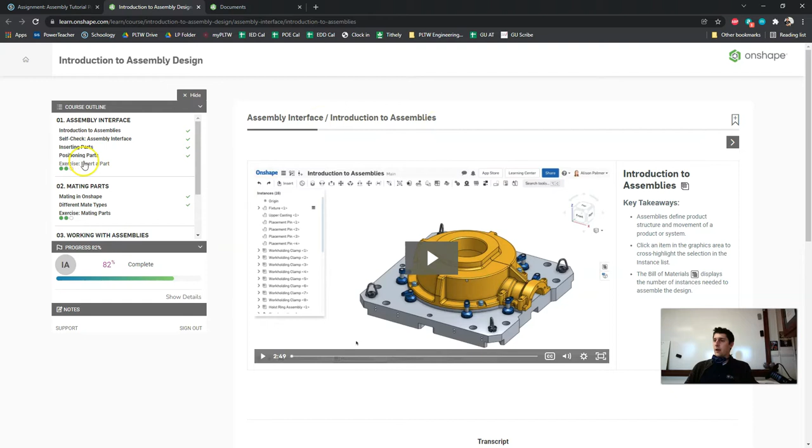Okay, I'm going to skip the instructions, but you definitely should not. These videos are very useful for your understanding of assemblies, but in this video I'm just really showing how to make the parts. So the first one that we're going to make is this part right here, which is the universal joint part. So I'm going to go ahead and start the tutorial.

The first thing we're going to do is click on this link to open Onshape's version of the public document. Now this is a read-only document, so if we really want to edit it, which is what we're doing, then we want to make a copy of this. So I'm just going to rename the back end of this, removing the copy part, putting my name on it. So that will open my own version of the document.

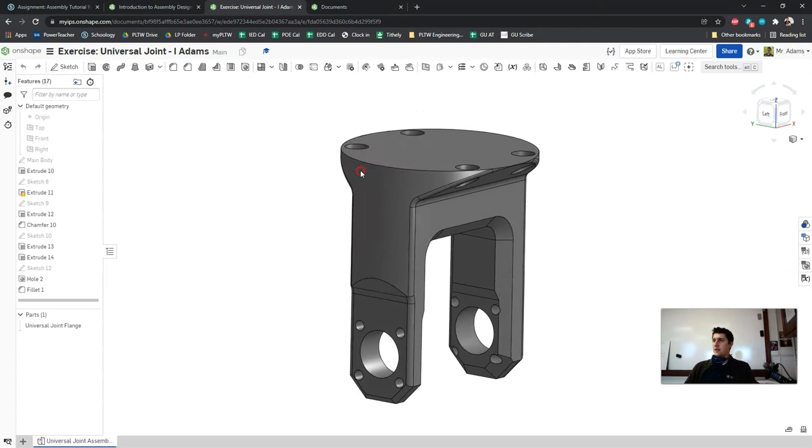So this is the universal joint part. I am in a Part Studio tab. So if we go back to the instructions and we go to the next step, you'll see that it's asking us to create an assembly. We're going to do that by going down to the bottom left corner of our screen, clicking the plus button, and going to Create Assembly.

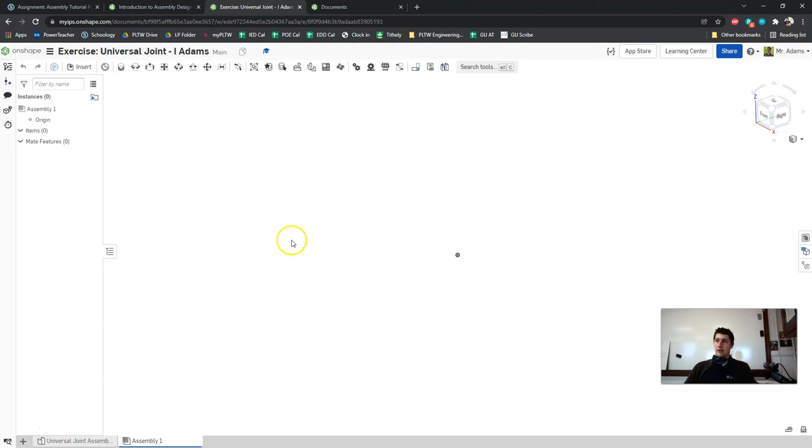Now, when we open the assembly for the first time, you'll see that our assembly environment is completely blank. There's nothing there, which is why the next step is for us to insert the part from the menu. So I'm going to go to Insert, click on my part, the universal joint assembly, and after it thinks about it for a minute, you can see that there's my part.

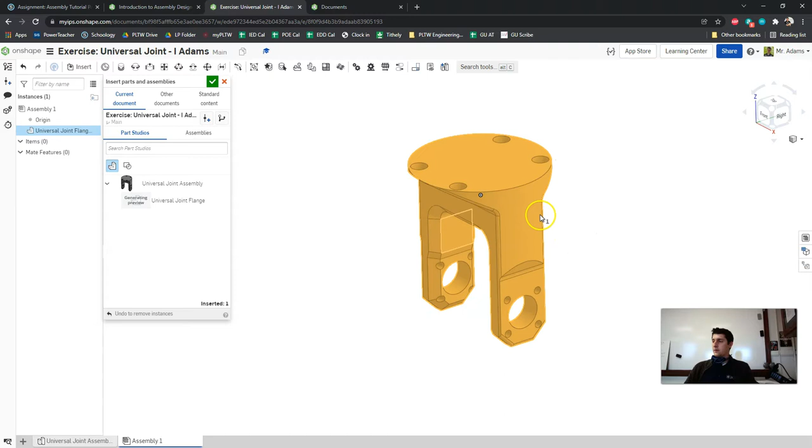So I'm just going to click to place it, and then I will click the green check to accept. I don't really know why it's moving around like crazy like that. If you don't get the option to insert, then you might be in the Part Studio tab still, so just make sure you go over to the Assembly tab.

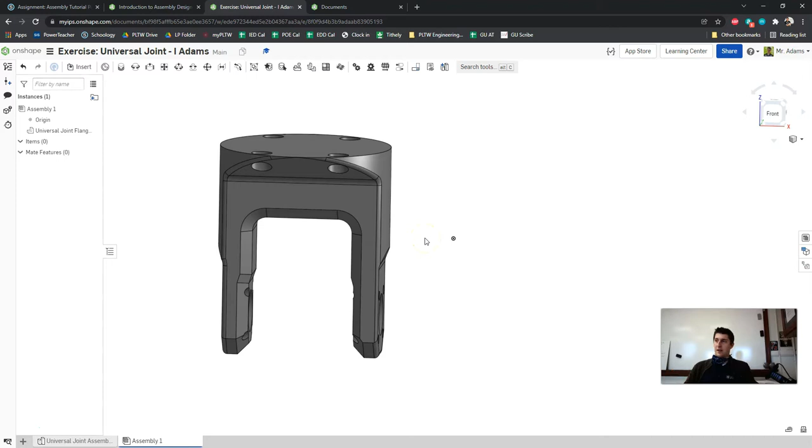Now, this part is in the assembly, but it doesn't have any relationship identified. It's just kind of there. It doesn't have a position or coordinates, or it's not fixed or anything. You can see I can just drag it around in 3D space. So part of today's tutorial is learning how to make something fixed and have a very specific place that it lives. So let's go to the next step.

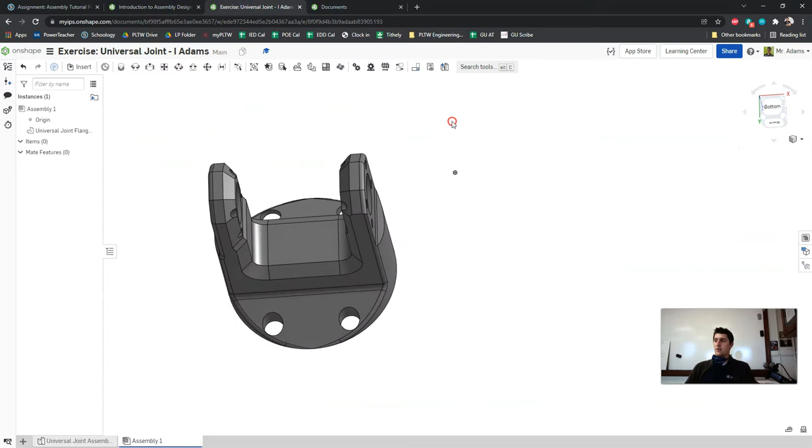The next step is a little bit confusing, so I want to make sure that you pay attention carefully here. So it says that we're selecting the part to display the triad manipulator. Then drag and drop the triad to the shown mate connector point. Alright, so let's start with the triad manipulator, which is really fancy sounding.

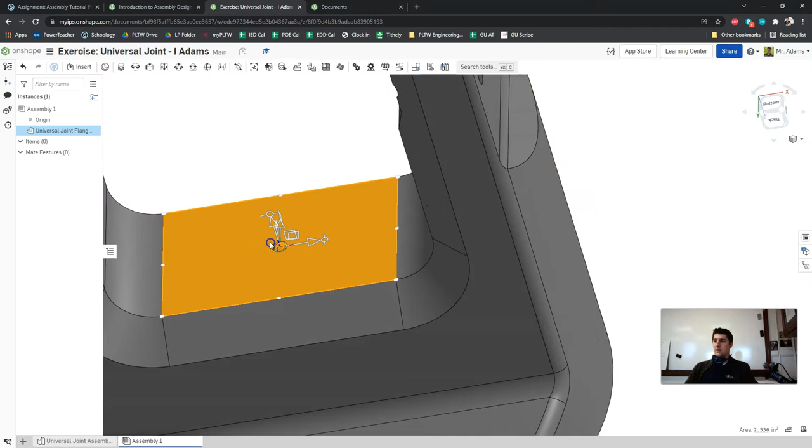If we click on our part, and I'm just clicking on this middle section here, you can see I get these 3 arrows that show up on my screen. That is the triad manipulator. It's called the triad manipulator because it's got 3 arrows. So what it wants us to do is click the center of this and move it until the triad manipulator snaps to the center of this rectangular shape here.

So you can see if I'm moving it around here and I'm getting some snap happening, I want it to snap right there, just like that. So your arrow should be pointed straight up from the center of this universal joint part, just like that. That's what they're asking for us to do. I thought that was a little confusing, but whatever.

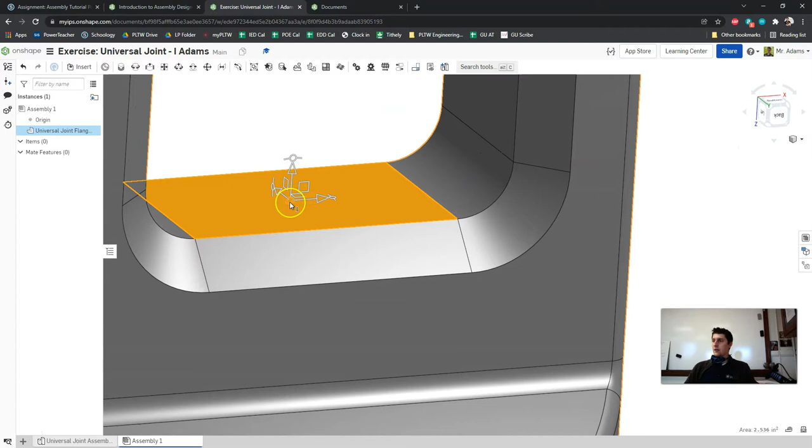Okay, step 5 says that we are going to move the part to the origin so that the triad position of the part aligns to the origin. Then we're going to right-click the center circle and choose Move to Origin. Alright, so we're going to right-click on the circle part of our triad manipulator, and the very top option there should be Move to Origin.

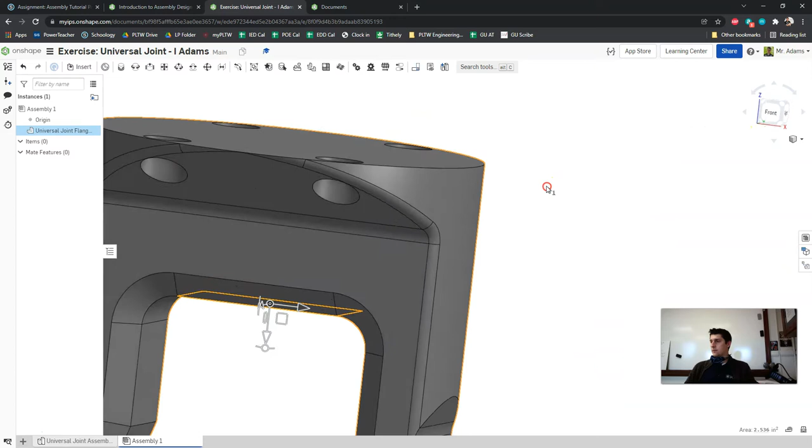Now when you do this, your part might move out of view if you were dragging yours around wildly like I was, but you can see now that my part is now aligned to the origin. Mine's actually upside down right now, but we can fix that. It's not a big deal.

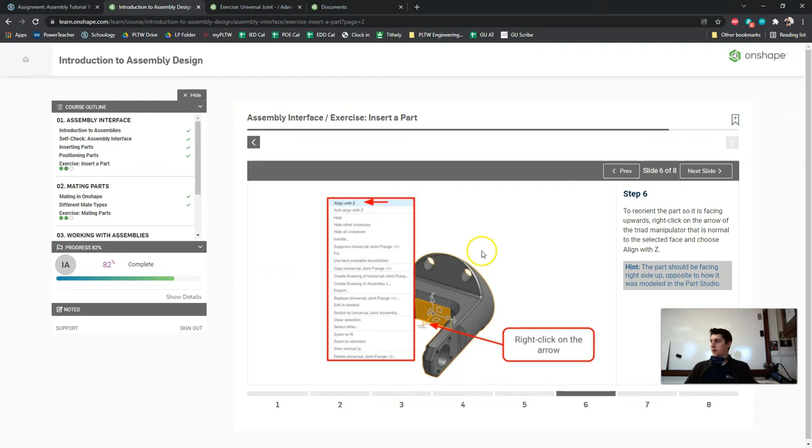Alright, so the next thing that we're going to do, step 6, says that we are going to reorient the part so that it is facing upwards. So we need to right click on the arrow of the triad manipulator that is normal to the selected face and choose Align with Z. So that's a lot of words. So we're going to choose this arrow and we're going to right click on it to make it align with Z.

And what happened is now my triad manipulator in the center here is pointed straight up.

Triad manipulator, why do you do this? Okay. We'll just get that guy back there. That's cool. There we go. Got him back.

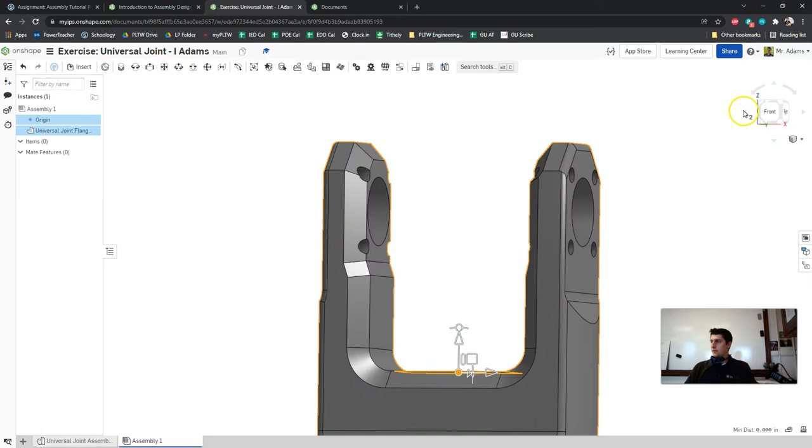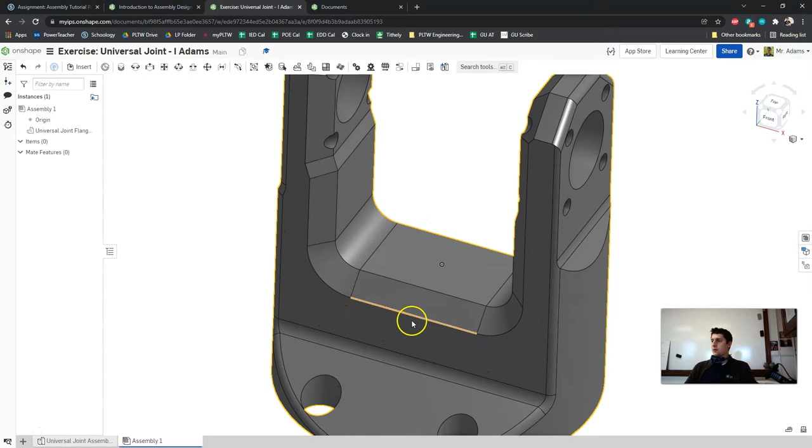So now I'm going to re-click and align with Z. Now it's flipped. You can see my arrow is still pointed straight up. Okay. Next step. And this is the last step for this object, is that we are going to click on the item, and right click on the item and select Fix. So we don't need that manipulator anymore. I'm going to right click on the item and I'm going to select the option in the menu for Fix.

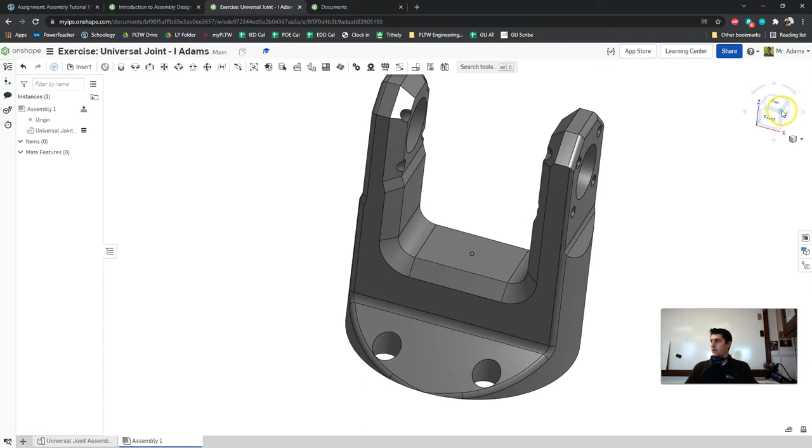Now what this does is it locks this item in place. You can see now that when I try to drag it, I get that no sign on my cursor, and I get this little symbol down here which means that it's fixed in place. So this part can no longer move. That's the first tutorial. Alright, let's move on to the next one. So that was Insert a Part.

Exercise 2 is Mating Parts. This one's a little bit more complicated. Alright, so we are going to open the public document that is called Exercise Clamp. I'm going to close all this other stuff here. Again, this is a view-only document, so we need to make a copy. So I'll click the copy button and rename this to Exercise Clamp I. Adams.

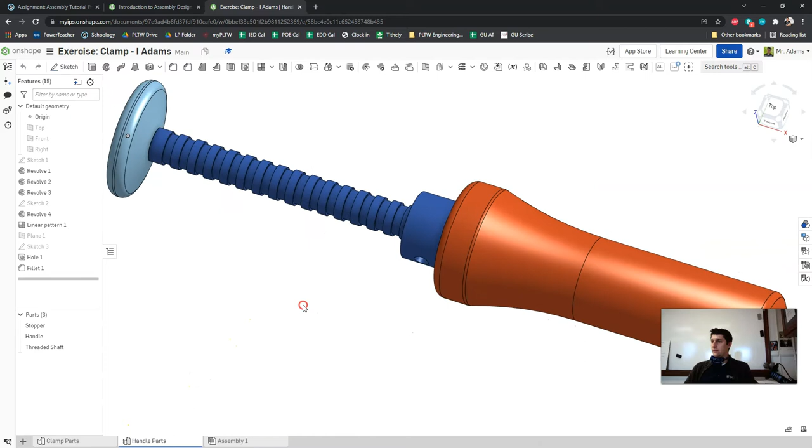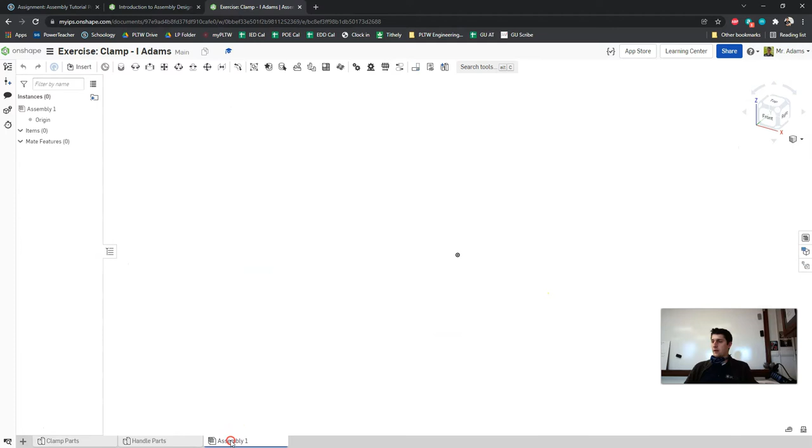Okay, so in this document we have two part studios. We've got one that's got this clamp body part here, and then we've got the handle. We also have an assembly tab that is completely empty. So let's go to step 2. Step 2 says that we're going to navigate to the assembly tab and we're going to rename this clamp assembly. So I'm going to right click on assembly 1 down here and I'm going to rename this clamp assembly.

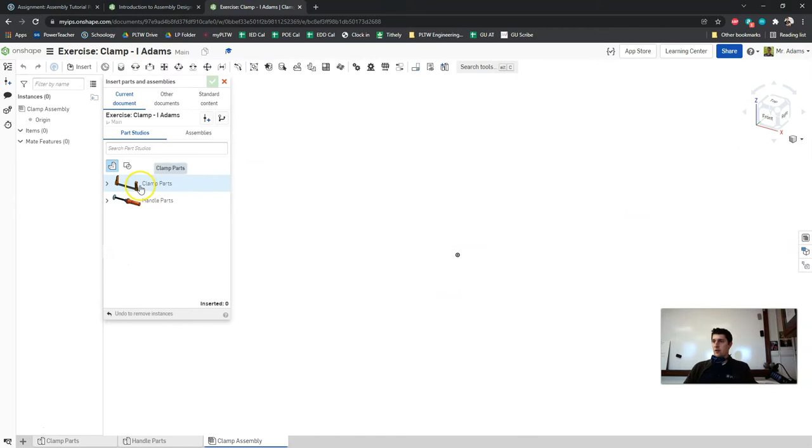Alright, step 3 is that we're going to insert the parts into the clamp assembly, and we need to make sure we put them all in there. So we're going to go to Insert. Here we have two different part studios, so I'm going to bring the whole part studio in and then the other part studio in. And I'm going to click the green check.

Now, as a warning, right now there aren't any relationships applied to this. So you can see that I can just freely separate all of these parts. And that's okay, because we're going to fix that. But just know that that's because there aren't any mates applied yet. Okay.

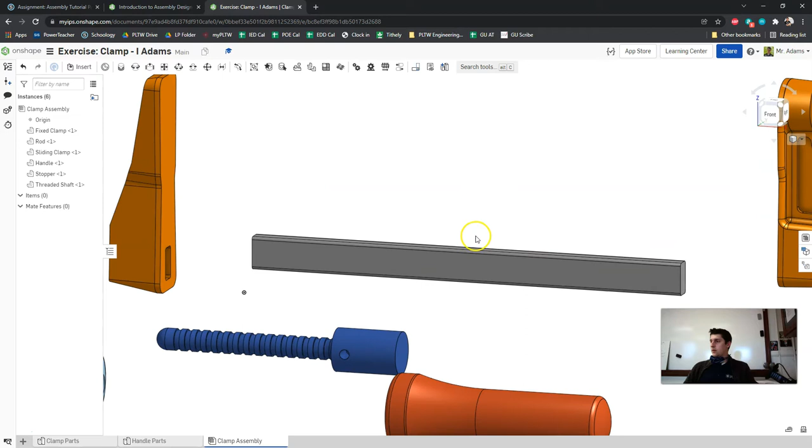Whoops. So now we're going to use the triad manipulator to move the rod so that the center of the front face aligns to the assembly origin. So we are going to make sure that we fix this guy, the center of it, to the origin. Let's do that real quick. I'm going to click on the part. I'm going to click on the center of my triad manipulator and I'm going to drag it until it snaps to the center there.

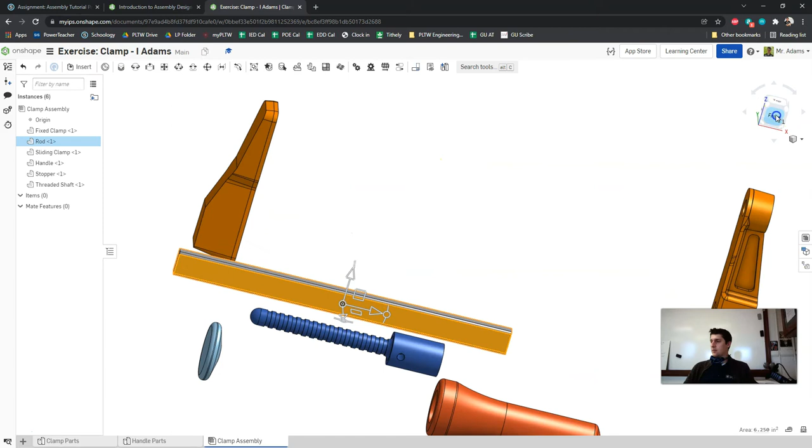And then I'm going to move this to the origin. And mine by default snapped to the front view, so I'm not going to change anything else about my clamp. So I'm going to leave it just like that. Alright. Oh, we forgot one step. So now I need to right click on this part and I need to fix it in place. So now it is aligned to the origin, and if you look over in the part menu here, you can see that rod is fixed in place.

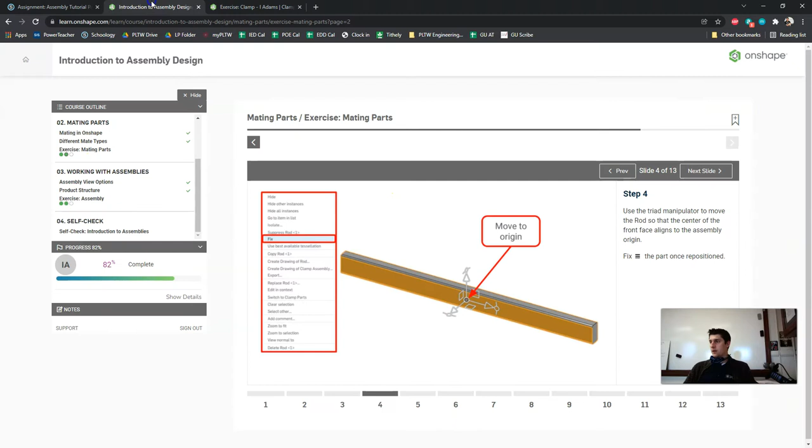Next step, we are going to use a fastened mate to connect the left end of the rod. If you've been paying attention to the tutorials, you know this is the fastened mate symbol up here. We're going to use this to connect the inside of this piece right here. Be careful which face you click, because you can apply it to the inside or the outside edge of this face if you're not careful.

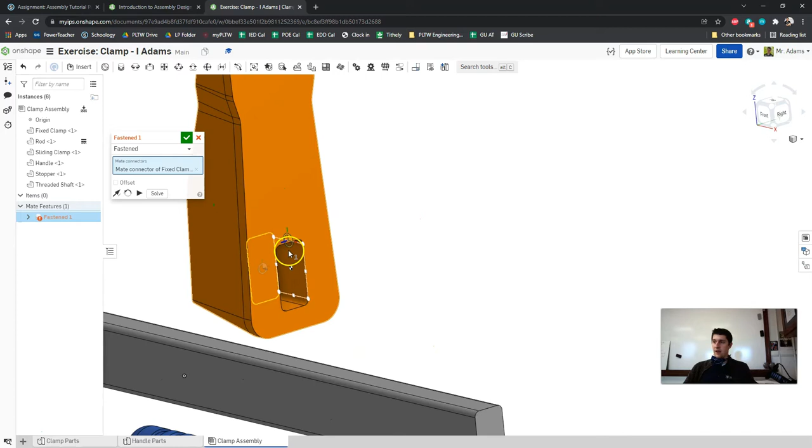We want to apply it to the very bottom of that hole, so I'm going to click right here. You can see it's selected that inner face instead of the outer face. So we want to mate that to the left side of the bar, using my mouse to orbit around and select a face. Sometimes Onshape struggles a little with the preview, but here everything looks okay.

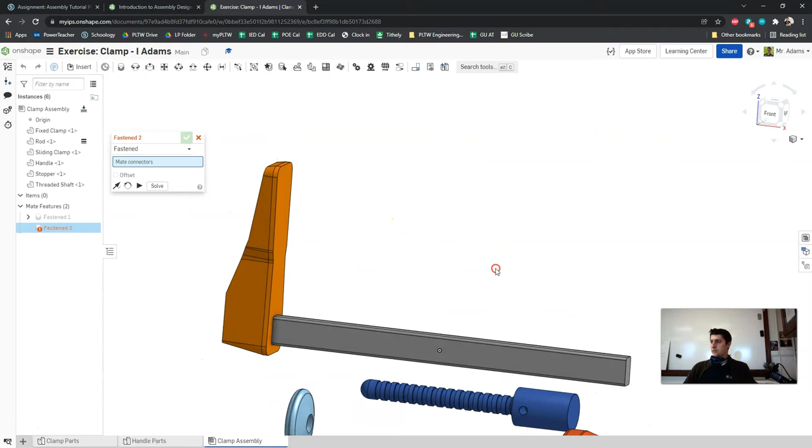I'm going to click the green checkbox, and then go to the next step, which is to use a sliding mate. It says to allow the sliding clamp to slide along a rod, create the slider mate between the end of the cut of the sliding clamp and the free end of the rod. Look at the face we're selecting here - it's the outside face, not the inner face, on the outside edge on the right side if it was connected. Then we're going to mate it to the very end of the rod.

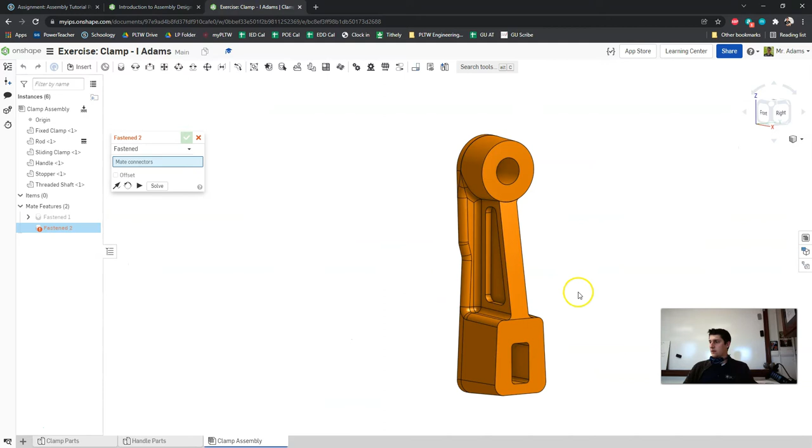Here is the piece that we are working with. Again, we're choosing this outer edge, so that's this guy right here. I'm going to select the slider mate from the menu, and place it on this outside face, and then again on this bar piece here.

Now we can test this by pressing the animate button. We can see that does in fact work, but we need to make some changes because that's not the direction that the clamp is supposed to move.

Let's scroll down in the instructions - it says the mate connector should be centered in the cut. If needed, hold the shift key to lock it. Apply a limit allowing the sliding clamp to move 7.5 inches to the left of the rod. So we need to check the limit option in the slider mate menu, and set the maximum to 7.5.

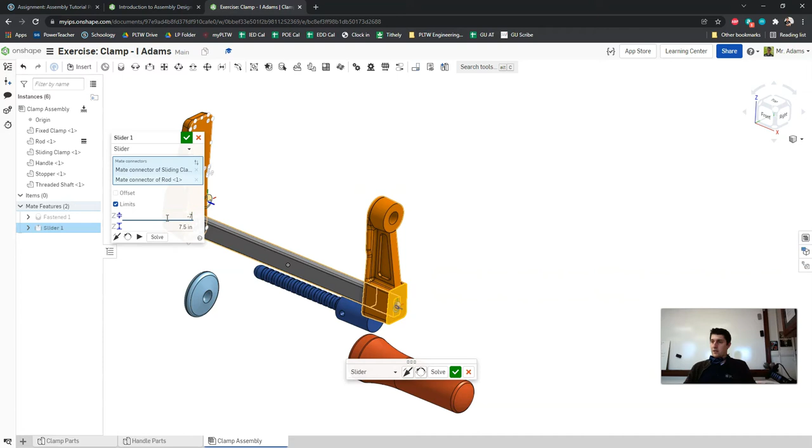Let's see what that looks like now. It looks like that's going the opposite direction of what we want. So I'm going to change this to negative 7.5 and put the maximum to 0. If we test this now, you can see my bar clamp moves in the correct direction. We can click the green checkbox. Now we can move this back and forth along the clamp to make sure it moves exactly the way it's supposed to.

Next step. It says we're going to insert - oh, we already did that, these parts are already there. So I'm going to skip step 7.

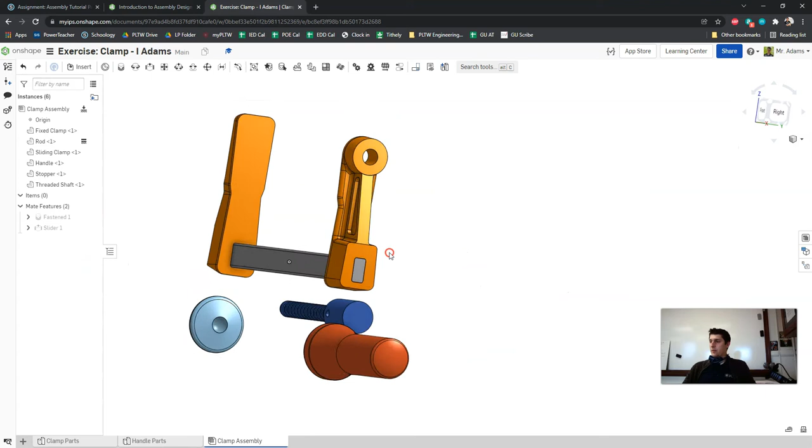We're going to do a fastened mate between the handle and the threaded shaft, which is this blue metal part. Make sure you apply the fastened mate to the inside of the handle. I'm going to start with this guy here and use the fastened mate.

We'll just wait for this to be done.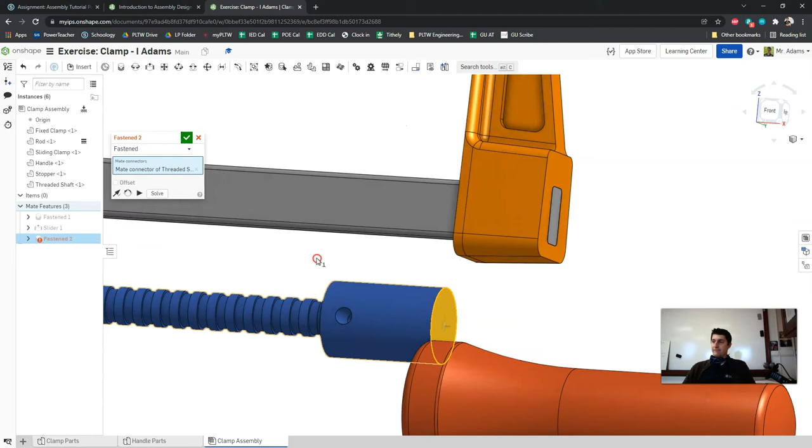Remember that time I tried to make a recording? Good times.

Anyway, we are going to apply a fastened mate to this side and then the inside of the handle here. Again, if it's sticking out too far, you probably didn't fasten it to the correct face. So I'm going to click the green checkbox on this to accept that.

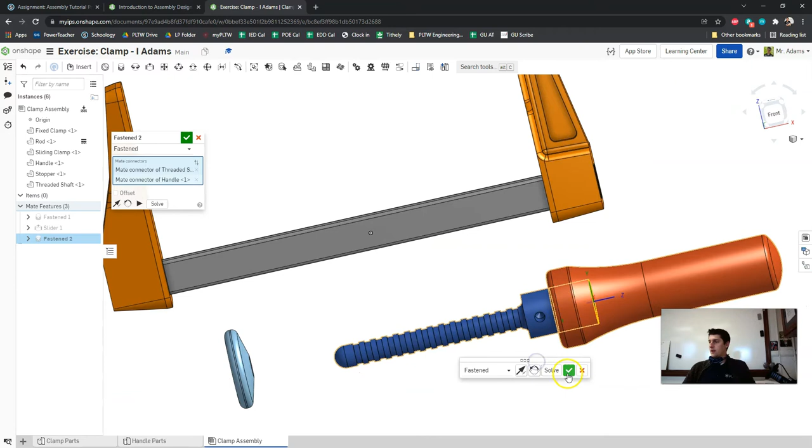So now this guy is fastened. Now, it's fastened, but it's not constrained to anything. You can see I can still freely move this around. There's nothing stopping it from moving. We'll fix that in a second.

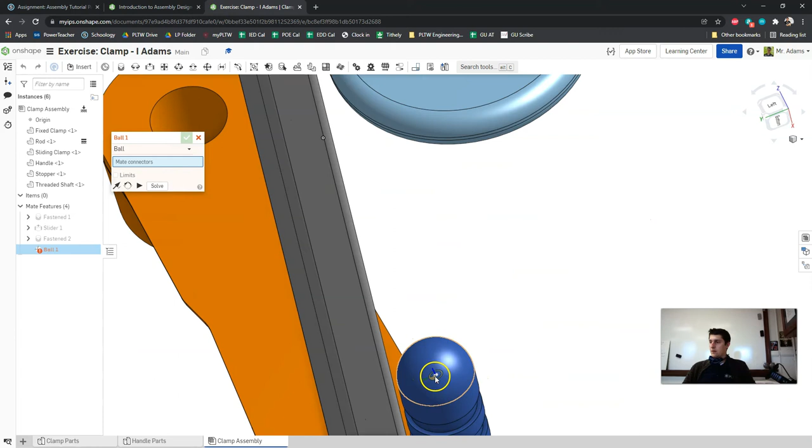Now we're going to put what's called a ball mate between the end of the threaded shaft, the blue part, and the stopper. Let's go in and apply that mate. This is the ball mate in the menu. We are going to come over to this shape right here, click on this guy - it's going to select the whole shape.

And then we're going to apply that to the inside of this. I'll go ahead and accept that. So you can see, well, hold on a second.

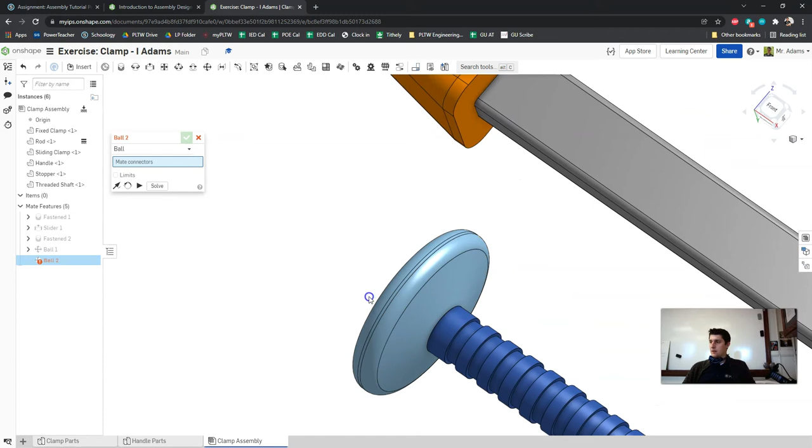I'll go ahead and press animate here so you can see how that works. You can see that it animates a little bit, it's a little bit derpy because it forgets that it is fastened to that other part, but you can see that that is in fact the correct motion.

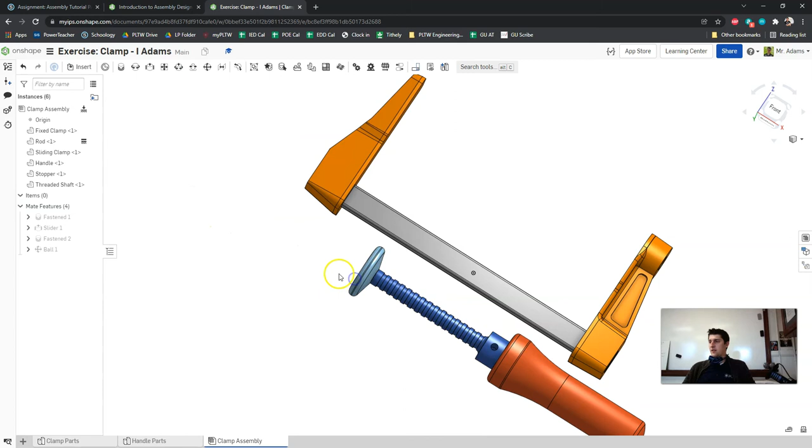So how do we fix it so that this no longer moves the way it does and so that this ball piece moves correctly? Well, we need to connect it to the rest of the clamp. So let's go to step 10. It says that we are going to mate the threaded shaft to the sliding clamp so that they slide and rotate with a cylindrical mate. Be sure that the set hole is towards the front of the assembly.

In the visual here, you can see that we are selecting the outer edge of this face, on the thicker part of the blue piece. And then we're selecting the outside edge of the right part of the clamp. So cylindrical mate is what we are looking for, which in the menu has the two different directions of motion.

So we are going to apply that cylindrical mate to this face, and then to this face. And you can see that it left these two parts here. It didn't actually do that - it's just simulating these two parts and forgetting the rest of the relationships.

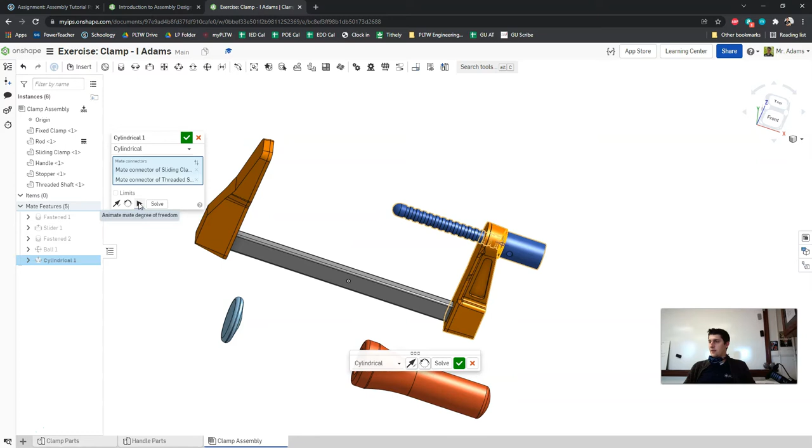But you can see here we can slide this, and you can immediately see that this is backwards of what it's supposed to be. So we can just switch these two parts and do it in the opposite order. Although I'm going to undo that first, so that this guy's back here.

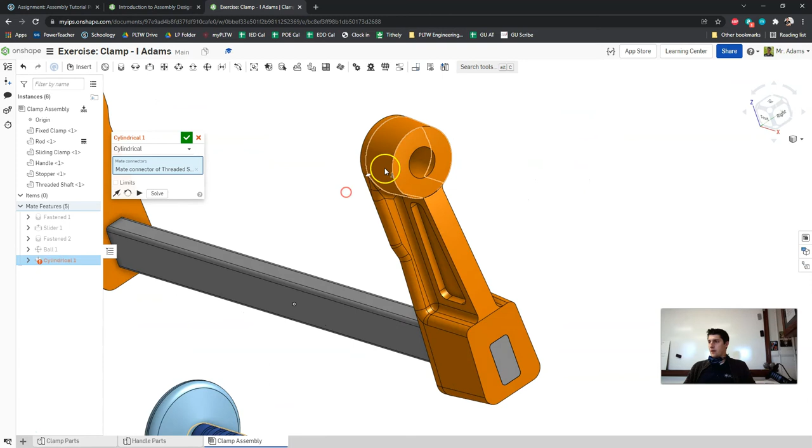So I'm going to go to cylindrical mate. This time I will pick this face first, and then come out here and select this face next. So now I get the correct direction of movement.

In the instructions, it says that we want to add a limit so that the threaded shaft can only slide 3 inches towards the left of the rod. So I'll check the limit box, and we'll put the Z maximum to 3 inches. And then we'll play that to see how that works.

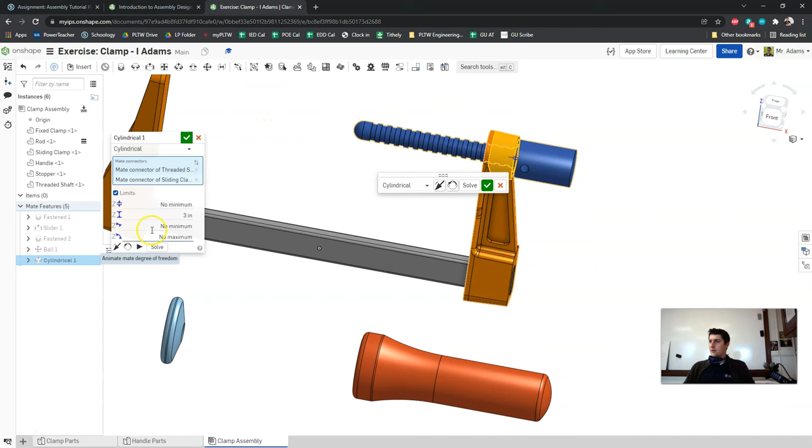We can put all our parts together here to see if that does what it's supposed to do. And oh god, it does not. So we need to fix that.

Let's step back. Looks like it's moving in the wrong direction. We want our clamp to move backwards, not forwards. So we'll set the minimum to -3 and the maximum to 0 and see if that moves in the correct direction this time.

And you can see that it does. See how it hits there and then it goes back the other direction? That's what we want. Alright, so now I should be able to move this bar clamp down here, and then I should also be able to move this shaft separately so that both pieces move.

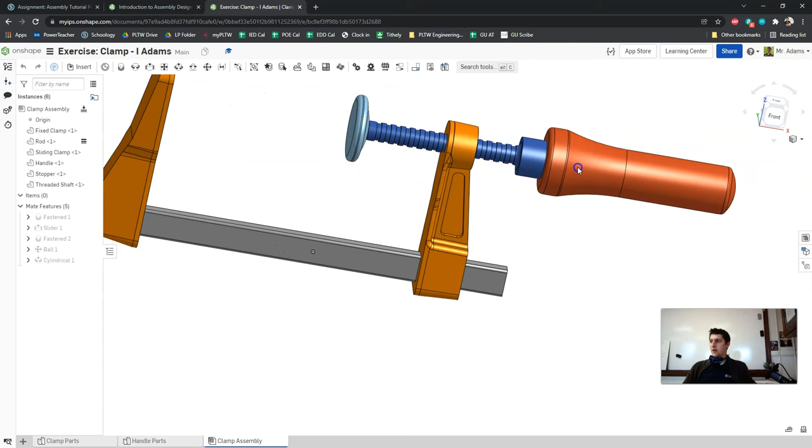So you can see that I can move this back and forth, and it moves along the threads there, and then I can also move this piece. You can see that as this shaft moves, that we get the rotation of the threads as well.

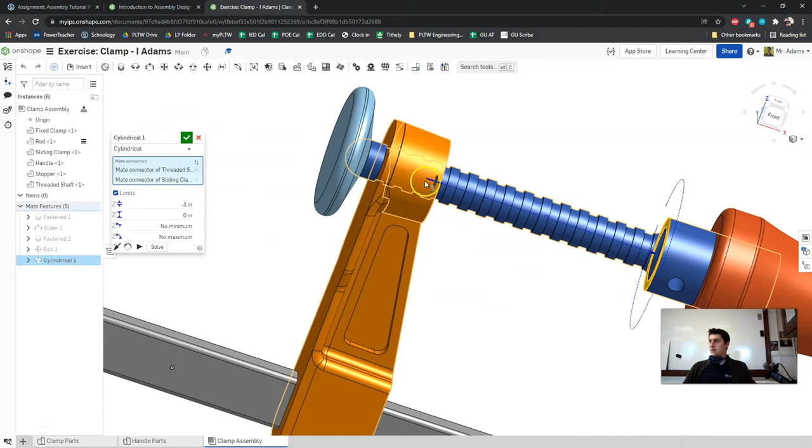Everything looks good there, and we can move into the last part, which is part 3. Now this one's using the universal joint one more time, so let's go ahead and jump into this guy.

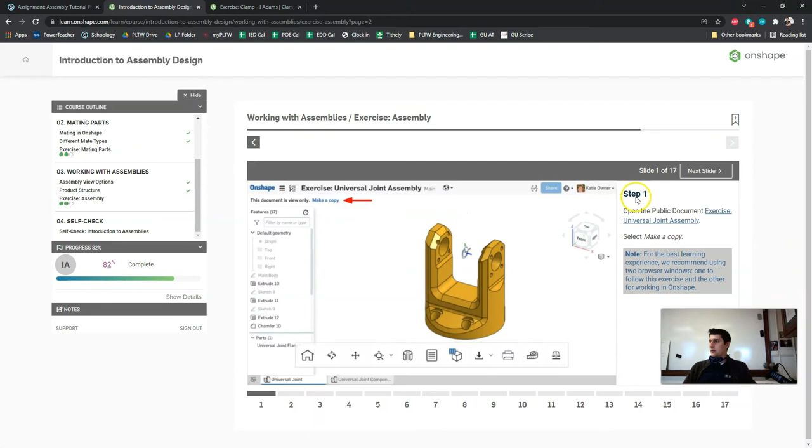We're going to open this exercise file. It's another public document. And again, we're going to make a copy to edit. So I will rename this Exercise Universal Joint Assembly I Adams.

So now I've got my part studio and a sub-assembly, so 2 part studios. So we'll go through here and create an assembly tab. This time they didn't make one for us, so we'll create an assembly. It wants us to rename that assembly Universal Joint Assembly.

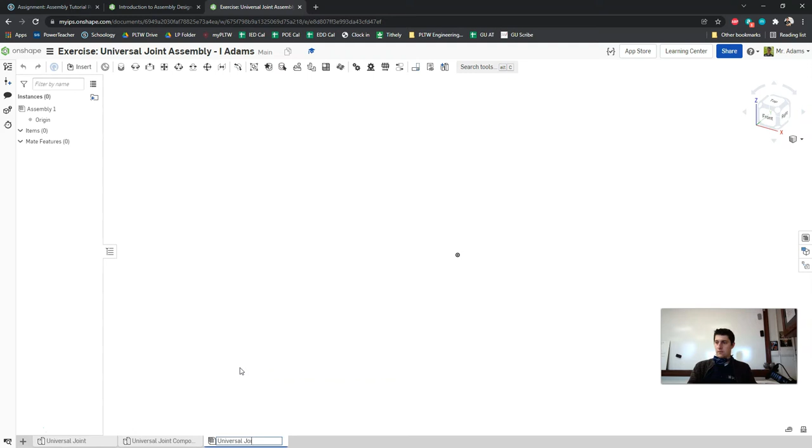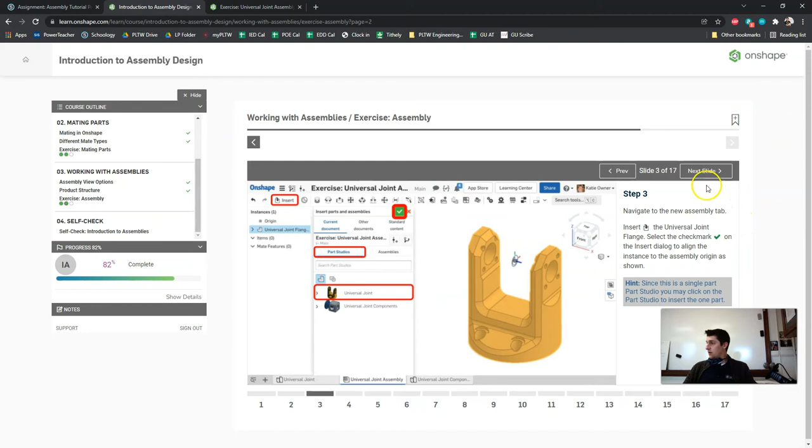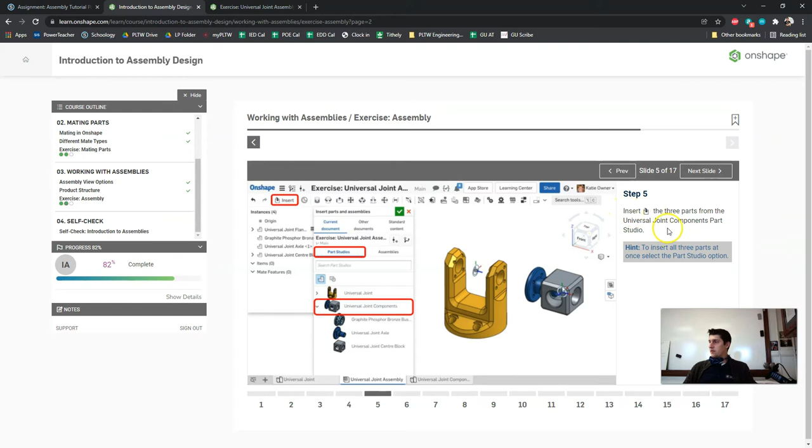Step 5 is that we're going to insert the other parts. It says insert the 3 parts from the Universal Joint Components Part Studio. So we're going to go back to the Insert menu, and we're going to click on the Part Studio. Now if you click on this drop-down menu, you'll see that each of the 3 parts is listed there separately. We want to drop in the whole Part Studio, which is all 3 parts. You can see that because if I move this, you can see each of the parts separately.

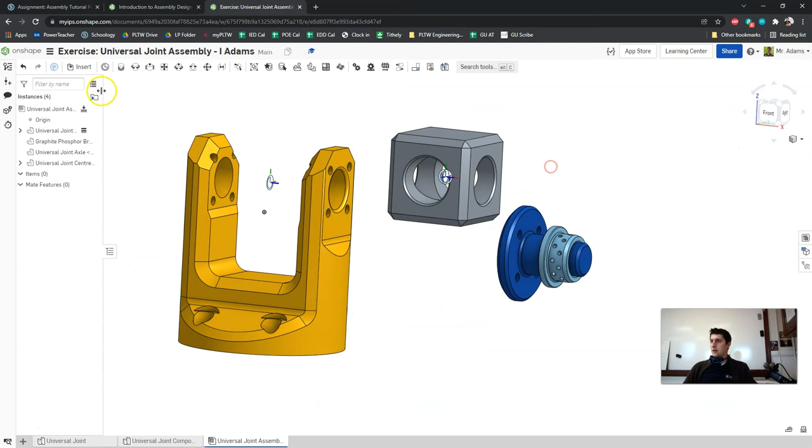Alright, so how does that work? We're going to go to revolute mate. I'm going to select the middle of this part and the middle of this part. You can see I can animate this, and that looks the way that it's supposed to.

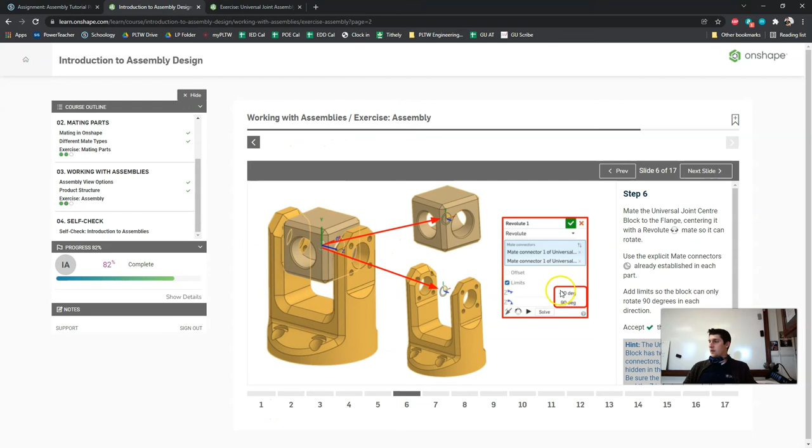In the instructions, they want us to put a limit on this of -90 and +90. So we'll go to limit, -90 and 90. We can animate that, and you can see how that works.

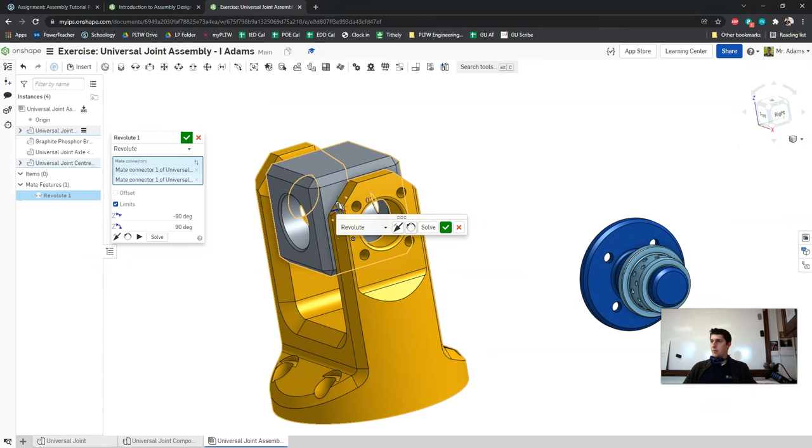All right. Notice that the solid part is on top here. That's what we want. So these holes line up on either side. We've got a hole here as well. And then the solid part is on top and bottom.

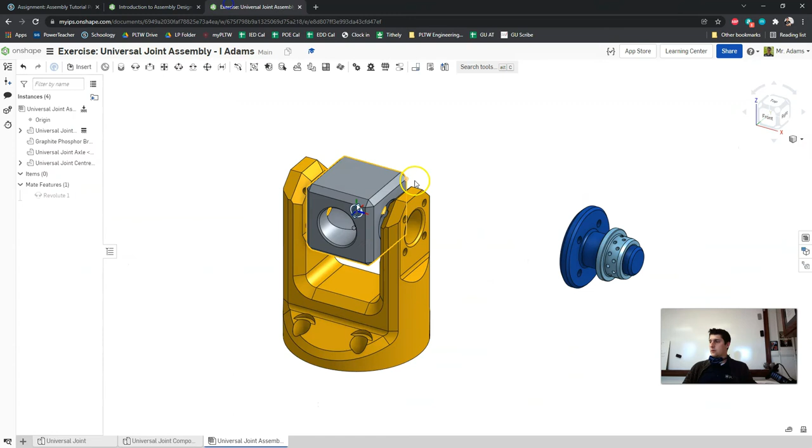Next step is we are going to apply a fastened mate to the universal joint axle and the bushing. So on the bushing, we're going to be applying the mate to the outside edge here, this face, and that will also be applied to this kind of tapered edge on the outside of the axle. So it should pretty much look exactly like this once we're done.

All right, so let's do that. Let me get my view right here. Okay, so we're going to do a fastened mate to this inside edge, just to the bottom of that fillet. And then we will also apply that over here to this face as well. And that looks okay. I believe that that's the way that that should look. Just like that. Okay, so we'll accept the mate.

Now we will mate the bushing to the center block with a fastened mate. We're applying it to the center of the top edge there, and then to this outer rectangular face on the left side.

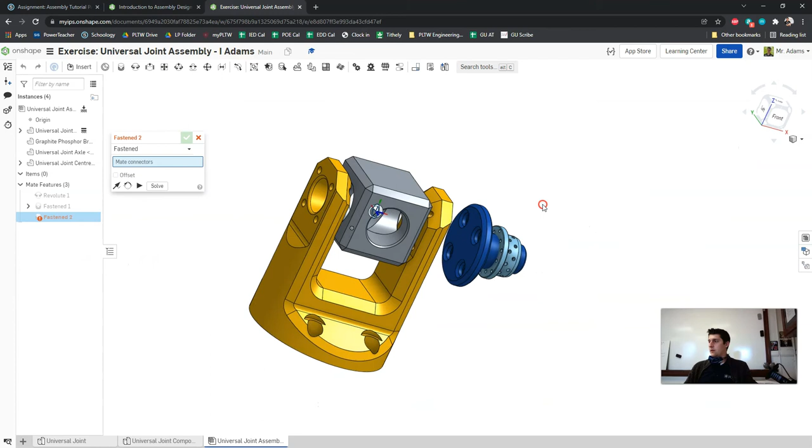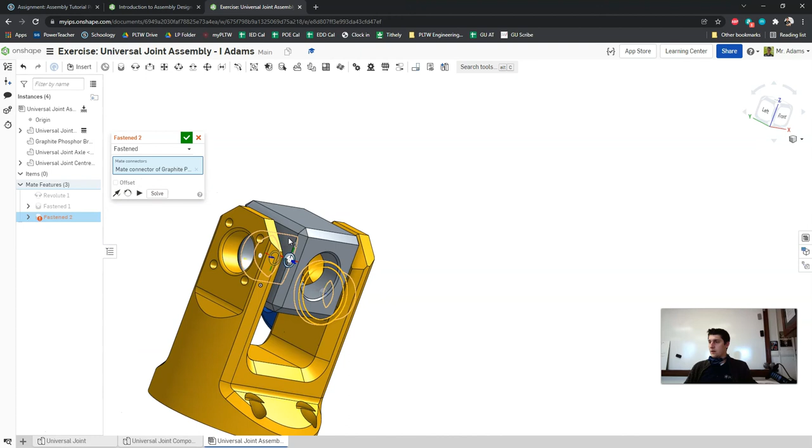So I'm going to rotate this way, just triple checking that I'm doing this correct. We want a fastened mate. We're going to put it on this face right here, and then also apply it on the left side face. So here's a trick for you. If you want to make sure that you are applying it to the correct part, you can hold down the Shift key. You can see here that the rectangular shape here is highlighted, and by using the Shift key, I can very carefully select which face I am applying this mate to.

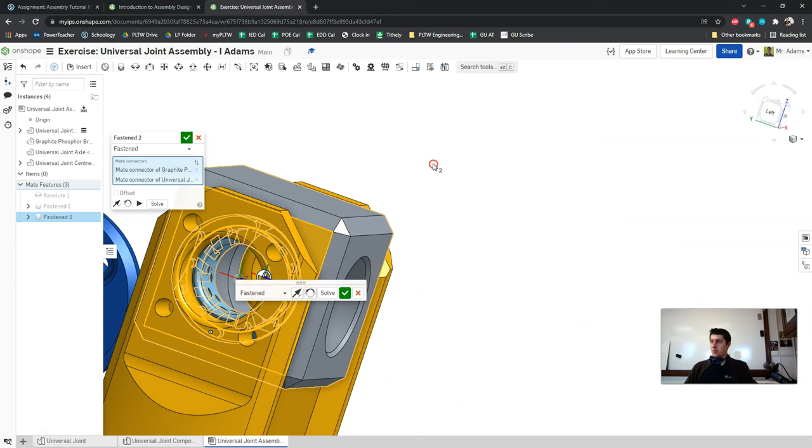So you can see that's what the preview will look like. Again, it leaves the other part behind when it does this. That's totally fine. Click the green check to accept, and then it pops it over. So that looks okay.

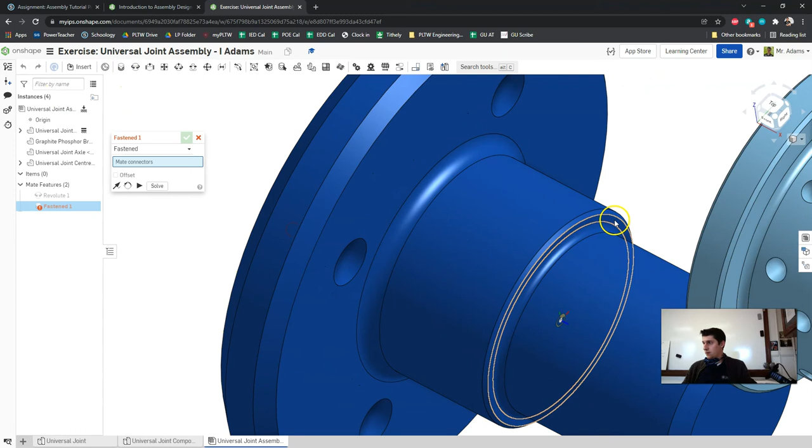It's got a little clipping here, which makes me wonder if I selected the wrong face. So let me step back a second. We'll try to reapply this mate. I go back to step 7, just to make sure that we are selecting the right face. So it looks like it wants the bottom edge of that fillet. Attaching that to this face right there. Now we'll do that mate one more time over here for step 8.

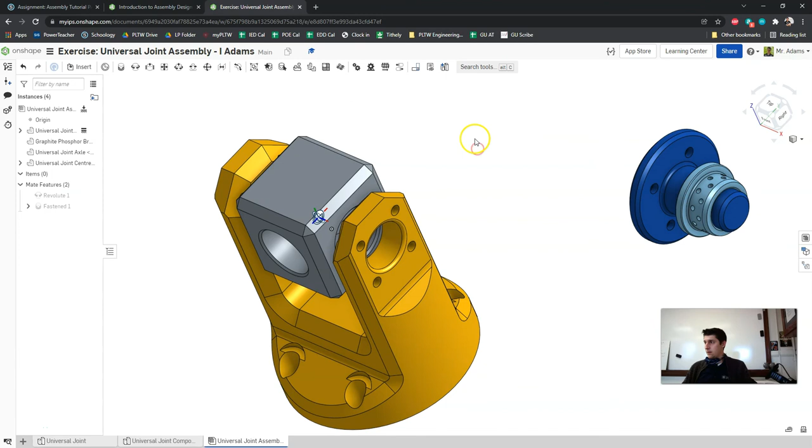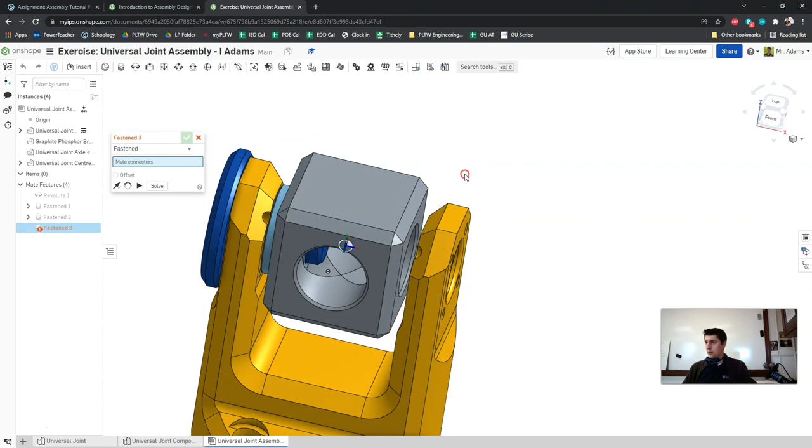We want to make sure that this fits correctly. So that needs to be on this, like that. Okay. So you can see I can still rotate this guy just fine.

Let's go to the next step. So it says, let's restructure the assembly and move the axle and the bushing to a sub-assembly. So we're going to select the 2 parts there on the left side, and we will move them to a sub-assembly. Over here we're going to select both of these, and I just held down the shift button to do that. And we're going to right click and click on Move to New Sub-Assembly. You can see that it opened a new part studio here with these parts. I think I clicked the wrong one. I sure did, so let me do that again. I'm doing great. Whoops, I need to...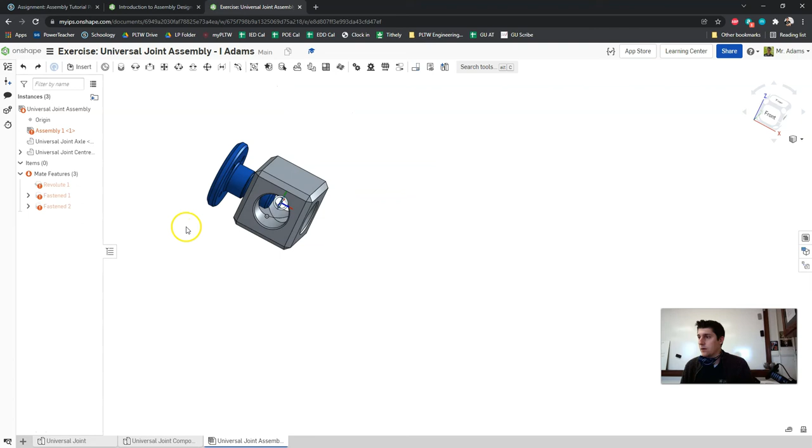Oh no. Well, I need to do some redoing here. Give me 1 sec. Okay, I'm back. Sorry about that. I accidentally deleted an assembly and I lost everything, but it's okay. So, make sure that when you are selecting these items that you select the right ones. So it says that we're selecting the graphite, phosphor, bronze, blah blah blah, and the universal joint axle.

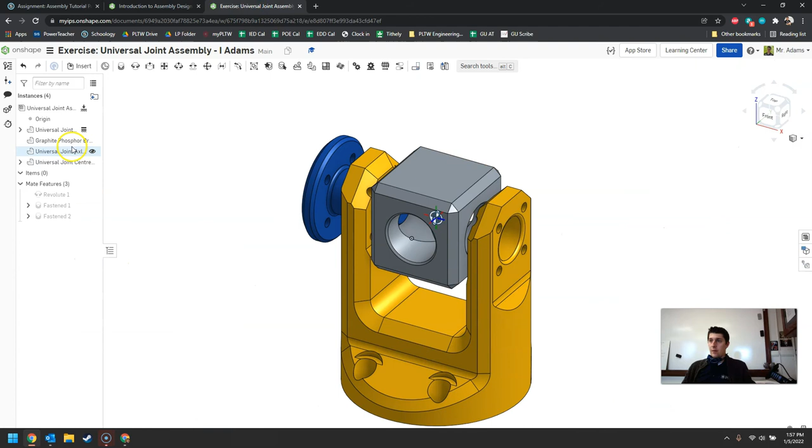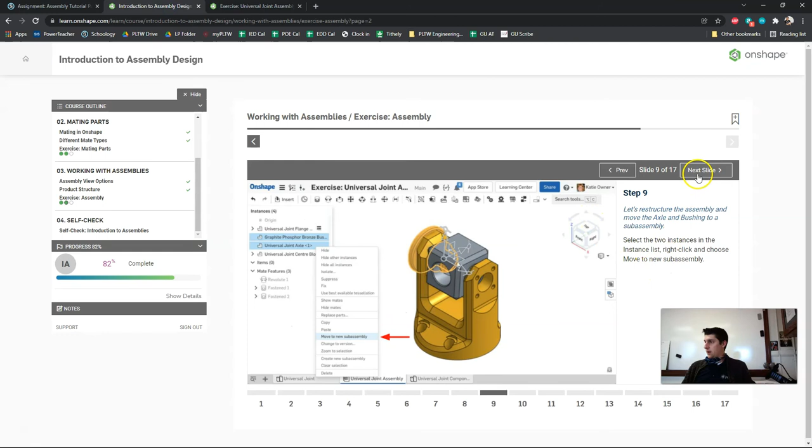So I'm going to go over here, I'm going to hold down shift to select both of these. You can see that this is the correct part this time. I'm going to right click and we will move to a new subassembly. Alright, so now I have an assembly over here, which is the subassembly, and we are going to rename that assembly Universal Joint Axle Subassembly. So rename Universal Joint Axle Subassembly. That's a lot of words.

Okay, so now we have that tab there, and so it says notice both selected instances and the mate between them move in the new assembly tab. So it means they're both stuck together. So then we're using the triad manipulator to reposition and reorient the axle as shown. So we want it to be anti-aligned to the z-axis. So I'm going to move this guy back here, get this guy oriented that way just like we did before, and just move to the center circle here.

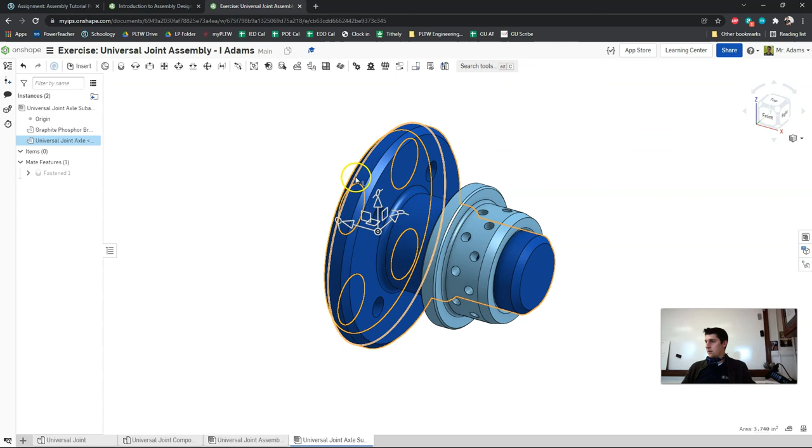Right click to move to origin, and then we are going to anti-align this guy to Z so that it's sticking straight up. Okay, now we're going to fix it in place. Now, no matter which part I click on, they're both fixed. Okay, next step. We're going to go back to the main assembly and we are going to use the replicate feature to instance the new subassembly.

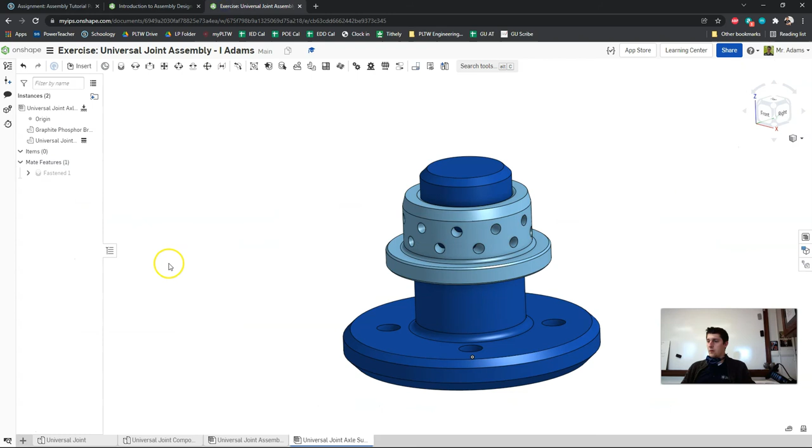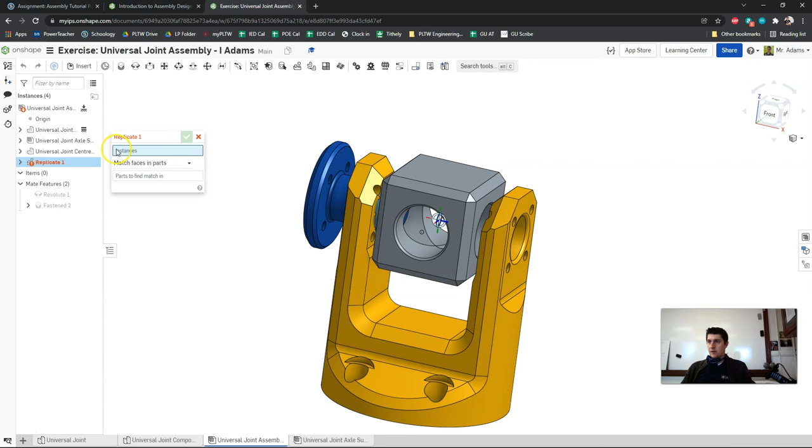So go back to our first thing here, and the replicate option is in the menu. It's this little drop down symbol here, so we're going to look for that guy, and it is this Lego piece looking symbol up here. So we are going to select that, and we are going to select the subassembly as the instance to replicate, and here is the universal joint axle subassembly.

So we're going to replicate that, and then it says that it wants us to select a face to find the match in. So select the subassembly, and then the faces are going to be these other 3 square edges of the silver block. So we'll just go through. First we got to click on the red box. We'll select our face here. There's a face. There's a face. And there's a face. Then we will click accept to place that. So now we have this guy here, which can rotate that away.

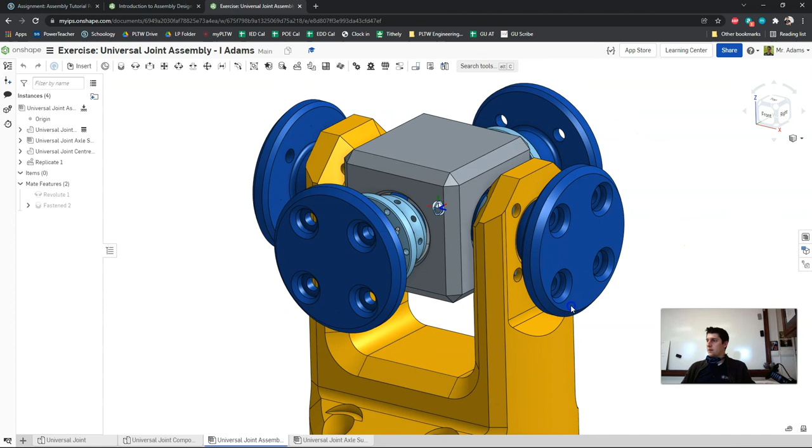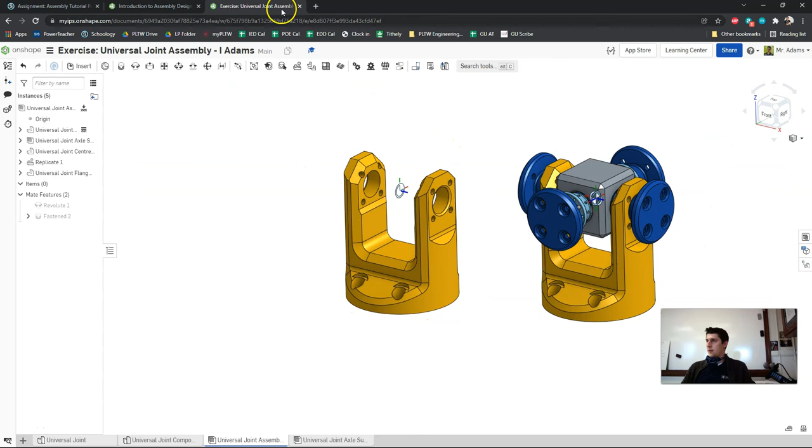Okay, move along. We're going to drop in another universal joint. We can right click on the instance to make a copy. Or, we could just drop it in from the menu, which is what I'm going to do. Okay. So now we are going to apply a revolute mate, and we are going to select this center part of the other universal joint, the new one, and then we will also select the center of the block, centering it so it can rotate. We're going to use the explicit mate connectors that are already established, which are the ones in the middle, and then we're going to add limits.

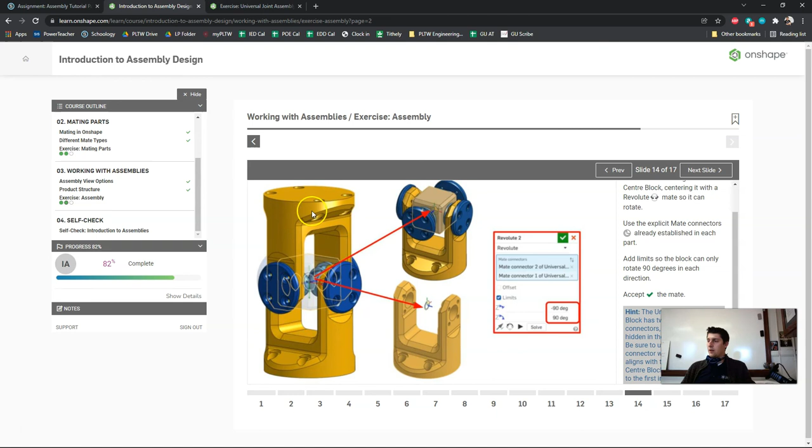The important thing here is that we want to make sure that we align this so that these guys are actually at a 90-degree angle to each other. So you can see that this bottom joint here is facing forward, and the other one on top is turned sideways. So let's go ahead and do that. Revolute mate this guy to the center of this. And you can see that it's just sticking it in where it was before.

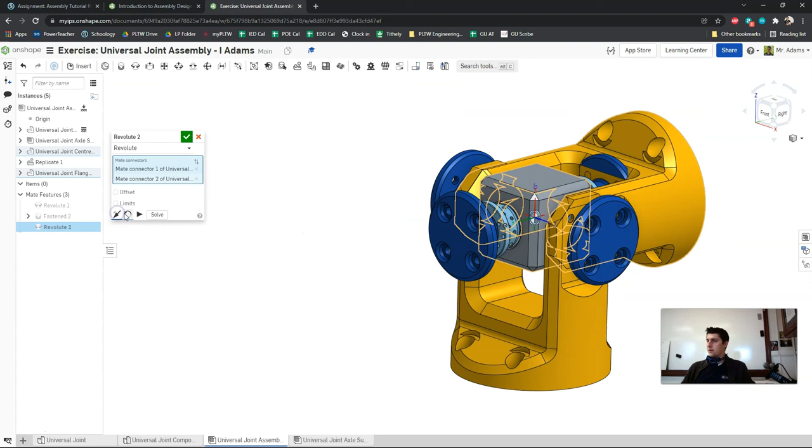We can use the flip primary axis here to rotate. That's still not right, so we need to click on reorient secondary axis to get the correct direction. So now you can see that I can rotate it so that it is, whoops, it's still not right. Let's see. Let's try that again. Move this guy over here. Gotta delete my revolute. Move this guy back out of the way. We want to revolute.

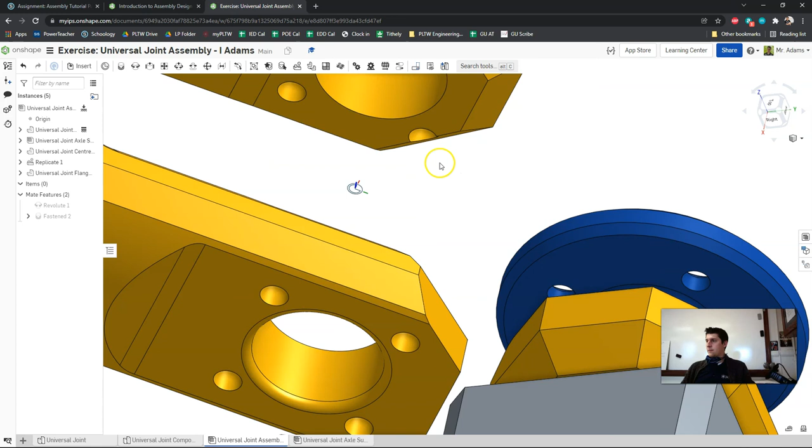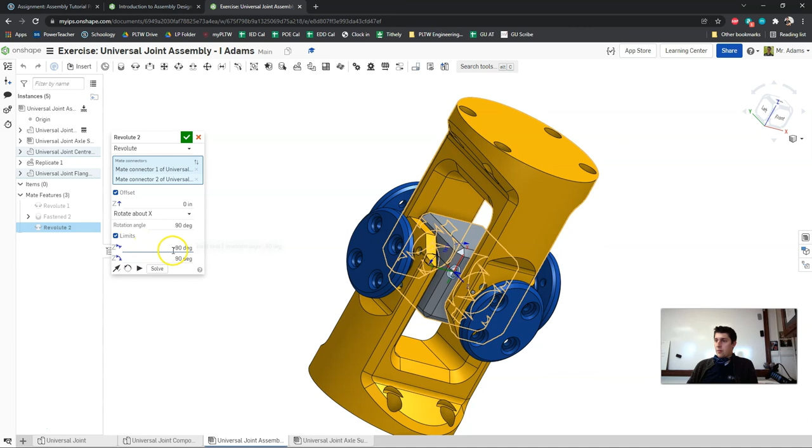Okay, so it took me a minute to remember how to do this. So what you need to do is in the revolute mate menu, set an offset, the z-axis, to rotate about the x 90 degrees. And that's how we get it so that they are 90 degrees to each other like that. We're going to put in a limit of negative 90 to positive 90, and then our joint is finished. You can see that we can rotate it in both directions there.

Alright, so once you're done with this, you'll screenshot this guy and submit it to today's box, and you are all set to go. Good luck. Let me know if you need any help.